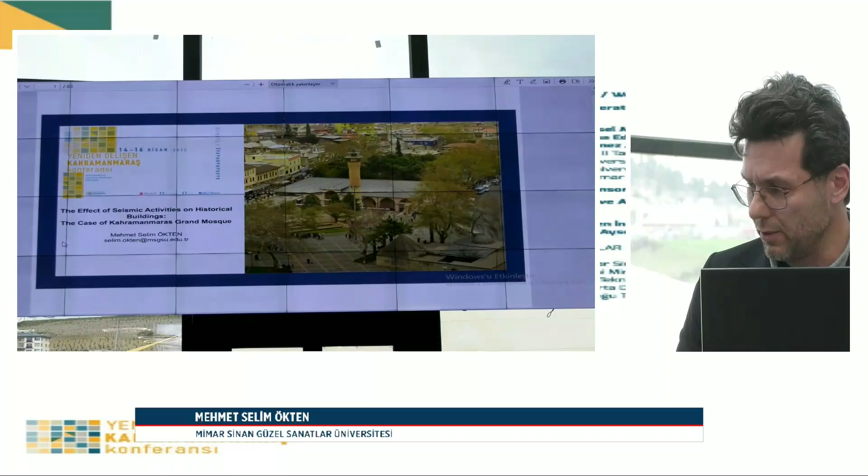After the February 6 earthquake, the Directorate General of Foundations, Vakıflar Genel Müdürlüğü, invited me to participate in scientific committees for historical structures in the earthquake region. So I am responsible for many historic mosques in the area, and I came here several times a year, to Maraş, Kilis, Elbistan and Antep.

So this is my content, as I mentioned before. Structural engineers love to show this map in their presentations, because these red and orange colors show the danger of the seismicity of Turkey.

85% of Turkey is located in a very severe, dangerous seismic zone. But unfortunately, after the earthquake, we immediately forgot where we live.

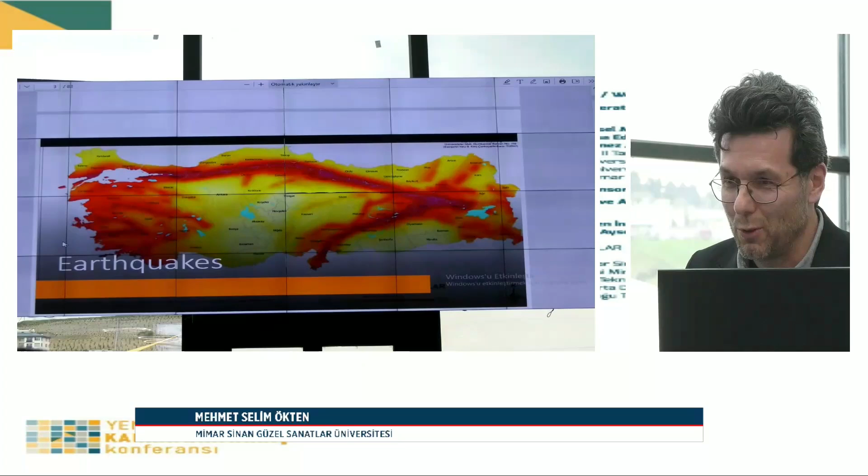The February 6 earthquake is a very unique earthquake. In structural calculations, we use this spectrum graphic, and this red line shows the limit we use for accelerations in our calculations. But you see these gray lines show that they exceed the limit, they exceed the code limit. So this shows the magnitude of this earthquake.

On the right side of the map, we show a rupture on the fault line, and also it affects a very huge area.

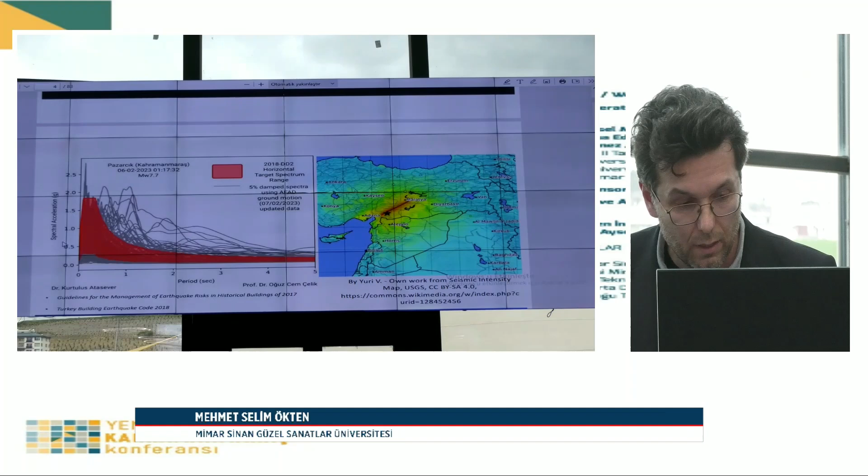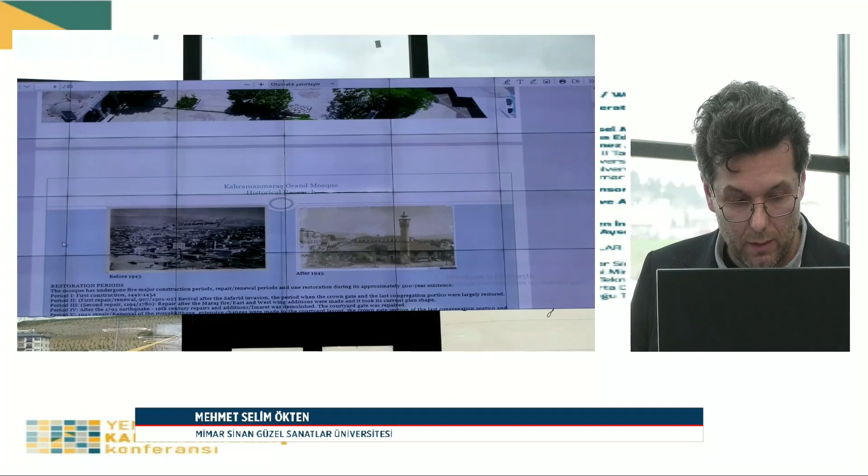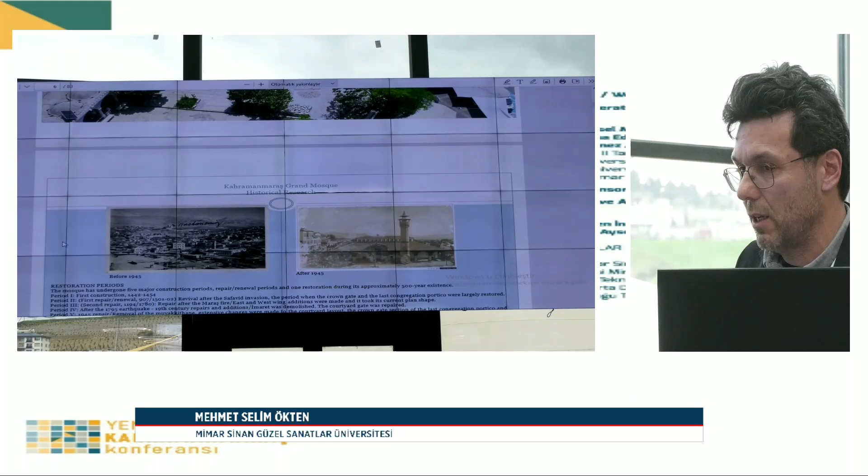Unfortunately, this picture shows that the minaret collapsed on top of the roof of the mosque. Historically, this mosque was built in the 15th century, and in five periods faced several renovations and restoration projects because of earthquakes and fires and things like that. But the important thing is between 2006 and 2007 the last renovation project was held, just nearly 15 or 16 years ago from this time.

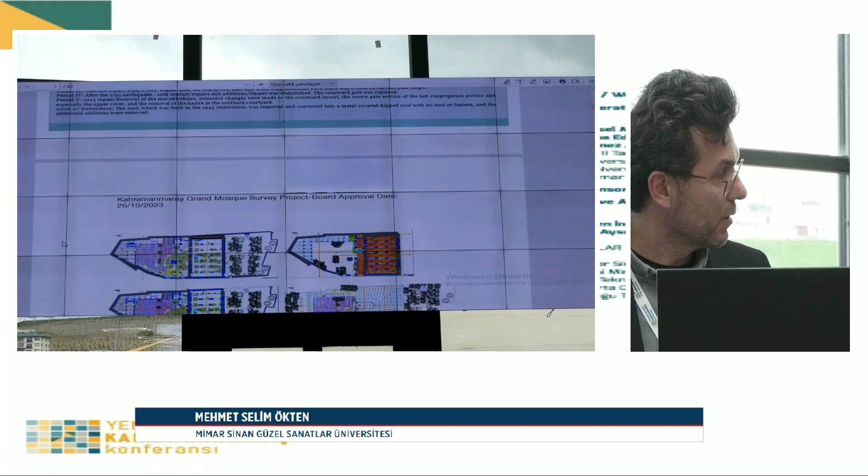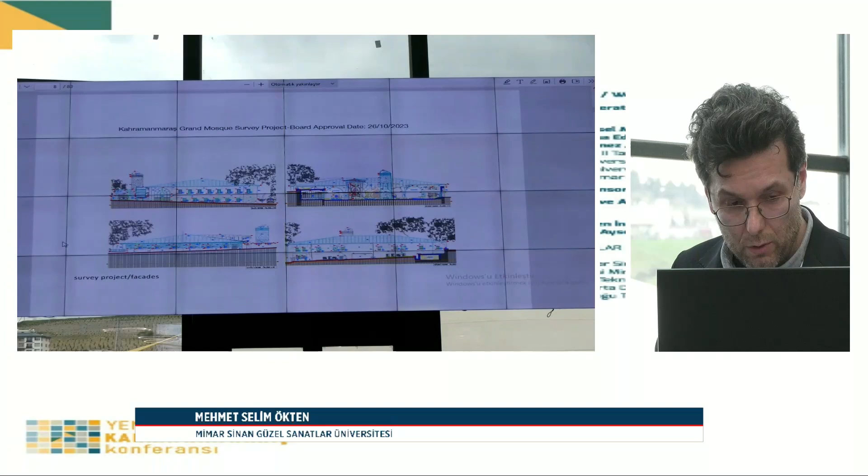After the earthquake, a comprehensive study started immediately. These are the drawings with board approval dates. The survey project started immediately to get information from the mosque, from the archives, from the thesis, from the photographs, because it's very important to document this mosque in archives. So the survey project started. You see also damages on facades of the walls, and all the cracks on the walls of the mosque.

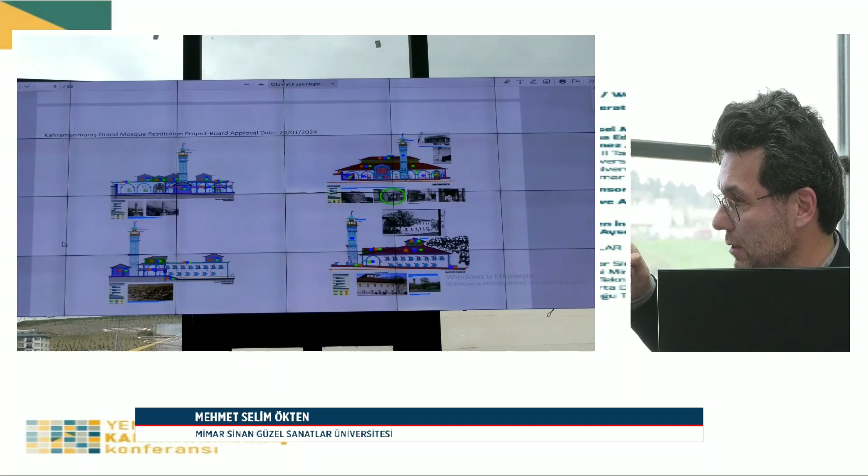In 2024 the restitution project was approved. Before 1945, in the time period of the history, we saw that the roof type was slightly different. The mosque had a different roof type, but the restoration project approved the current version of the roof.

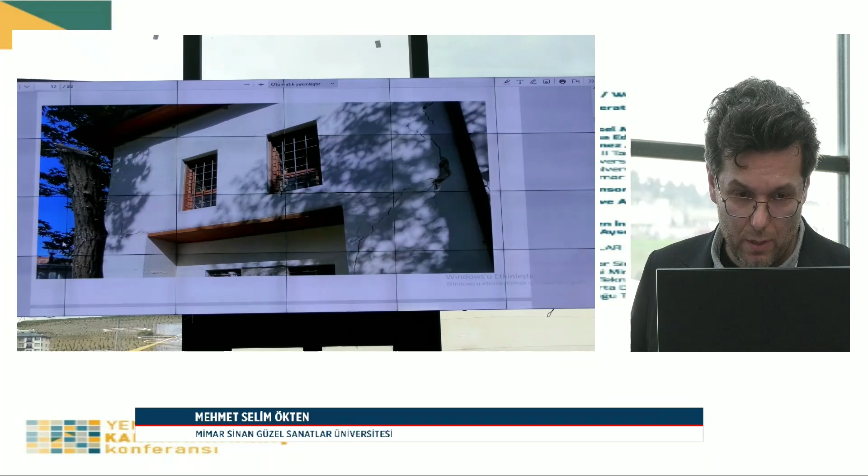As I mentioned before, the minaret collapsed on the entrance portal of the mosque, so it gave severe damage to the mosque. Also, all of the facades got cracks and damages. These are the photographs inside the mosque. Also you see how the plasters fall from the surface of the walls because of the magnitude.

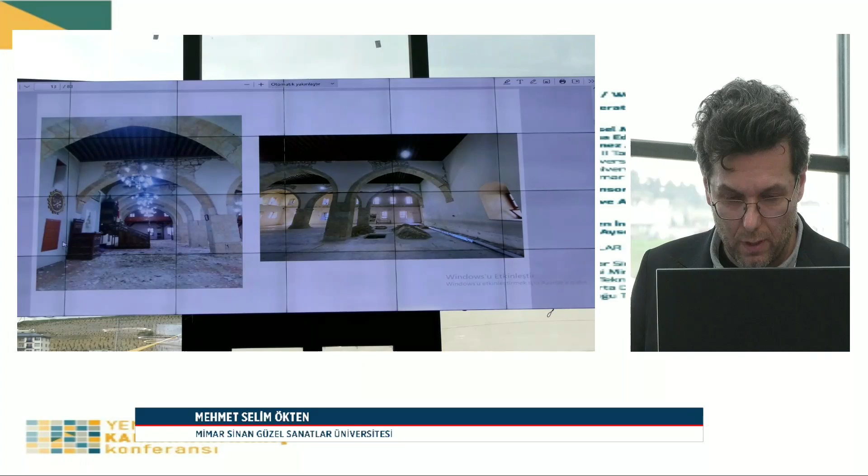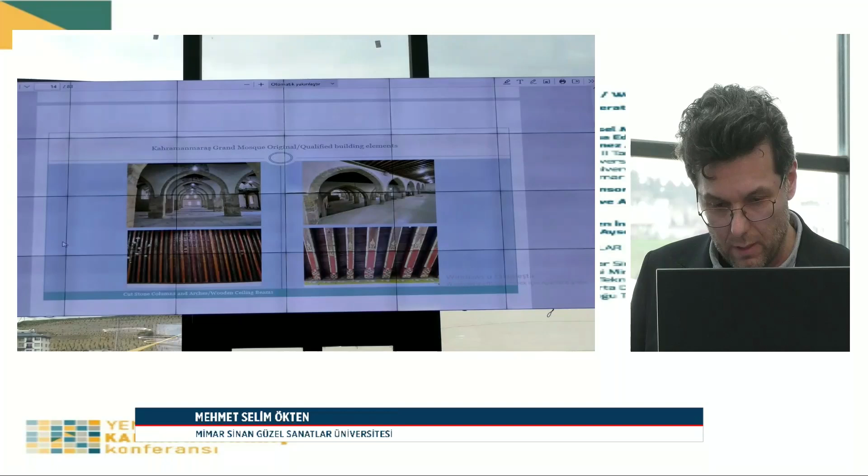This mosque is very unique for its stone columns, stone pillars, and also these magnificent timber beams with ornaments and drawings. It's very unique for this mosque. Also the kürsü, mihrab, and minber are very unique identities.

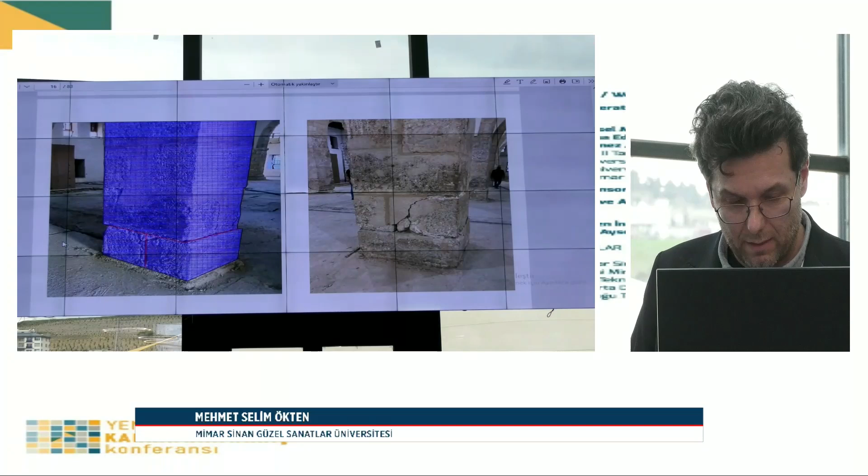Another damage is the displacement and movement of the columns at the base line of the pillars. You see the damages and the movement because of the earthquake effect.

After the earthquake, we tried to get observation and diagnose the mosque very well. So we did some openings to see the composition of the wall and also to discover the timber lintels in the wall. These pictures were taken from the west side, the west facade of the wall.

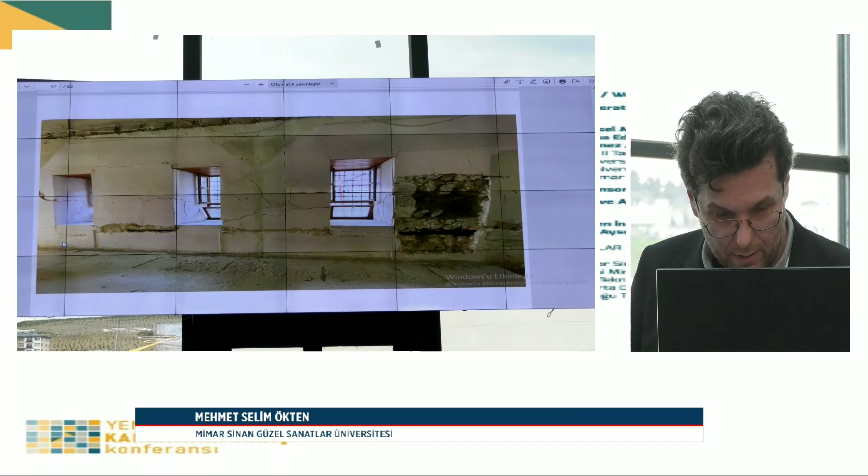At the left, you see white mortar injection in the left picture. This injection belongs to the 2006 restoration. It's a kind of hydraulic lime injection.

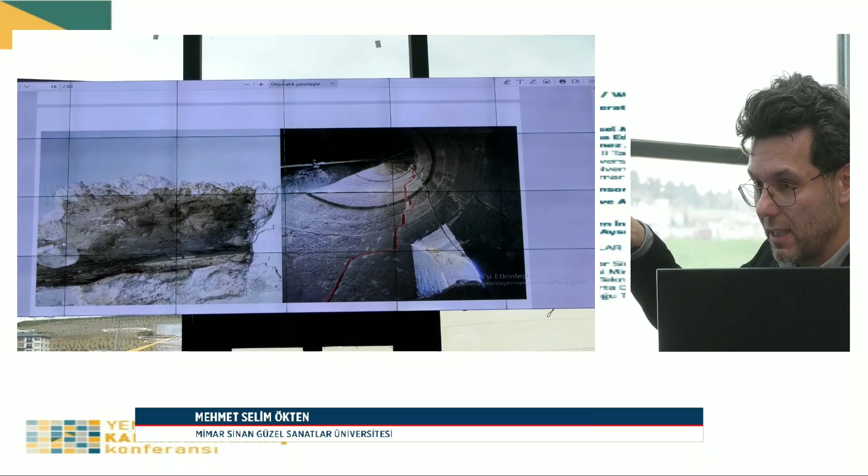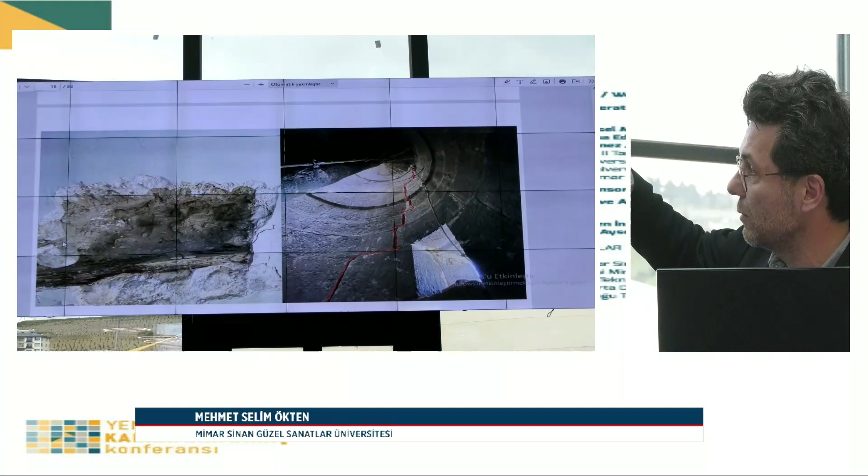Also, another point, you see the rotted timber beam in the picture. This picture told us a lot of information about the mosque, because this lime injection didn't work properly. It filled the gap, it filled the voids, but there was no bonding between the earth structure and the mortar structure. Yes, it filled properly, but it didn't bond the mixture very well.

Another picture belongs to the inside of the minaret, and also you see the cracks and deformation.

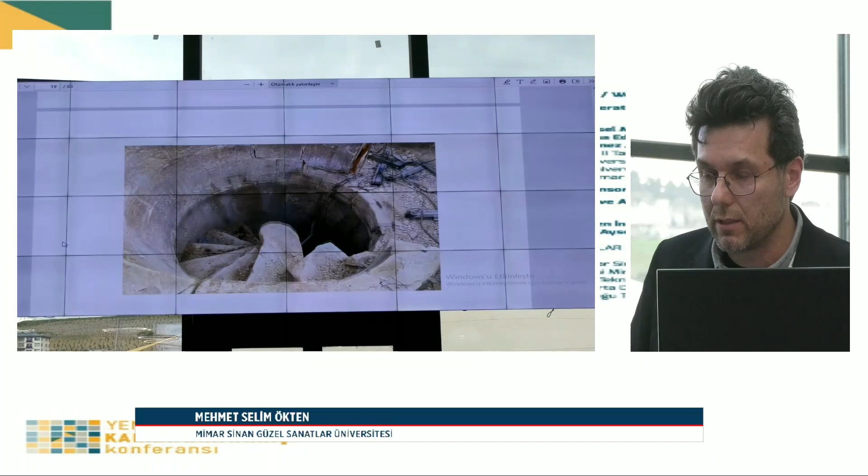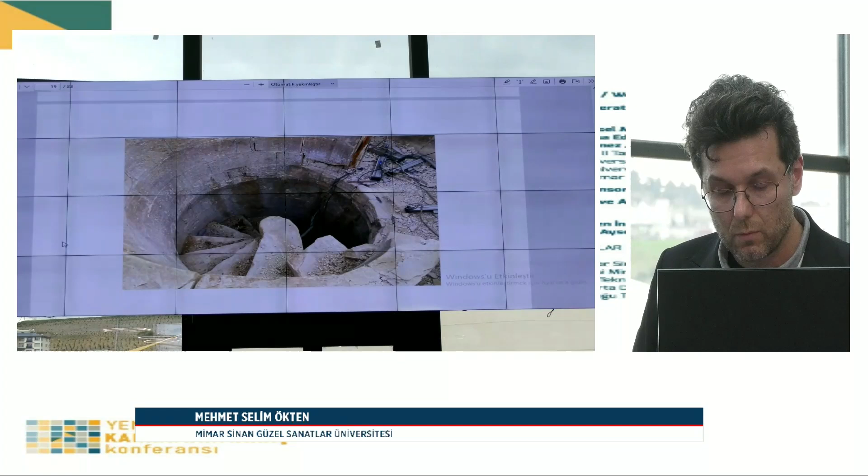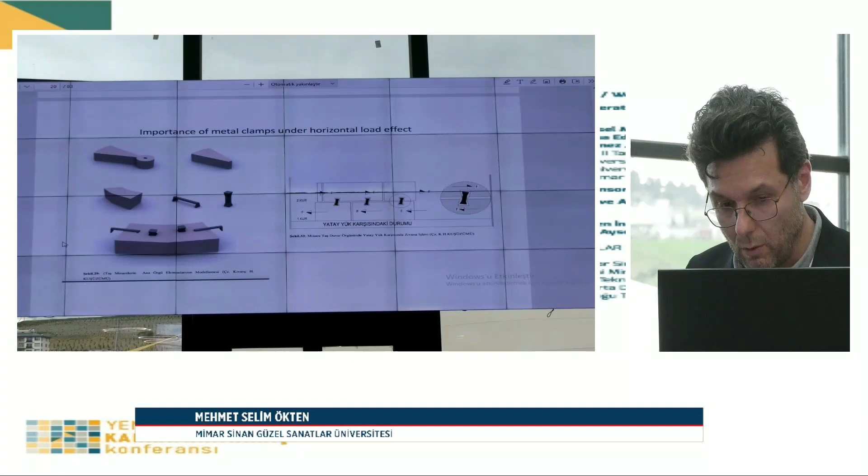Another observation from the minaret: generally in earthquake zones, we use vertical and horizontal metal clamps to connect stone together. It worked very well in earthquake zones, but in this minaret, we only discovered insufficient, corroded horizontal metal clamps. We didn't find any vertical metal clamps. Especially vertical metal clamps work efficiently in earthquake zones, taking the horizontal forces, as I've seen in the picture.

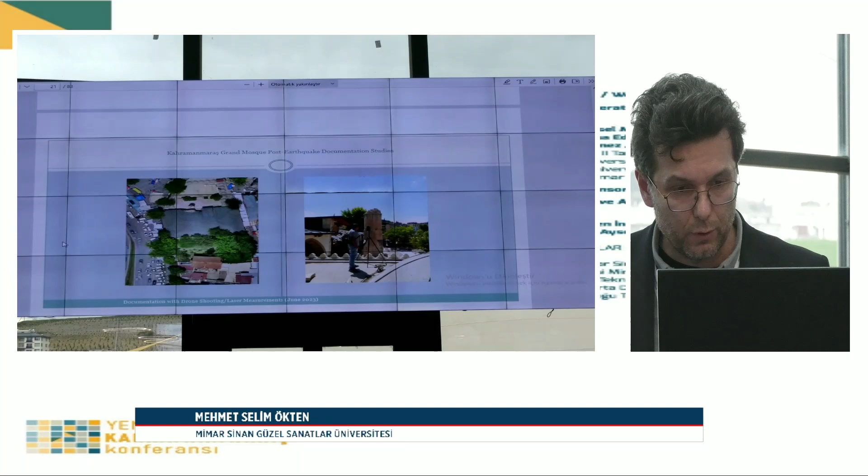So after the earthquake, documentation studies started immediately. These are the pictures from the scanning.

Because of the heavy damage of the minaret, the board decided to remove it, and these are the rubble cleaning and classification of original stones. When we remove the stone parts from the minaret, we classify them because if they have sufficient compression capacity, we will use these stones again in the reconstruction project.

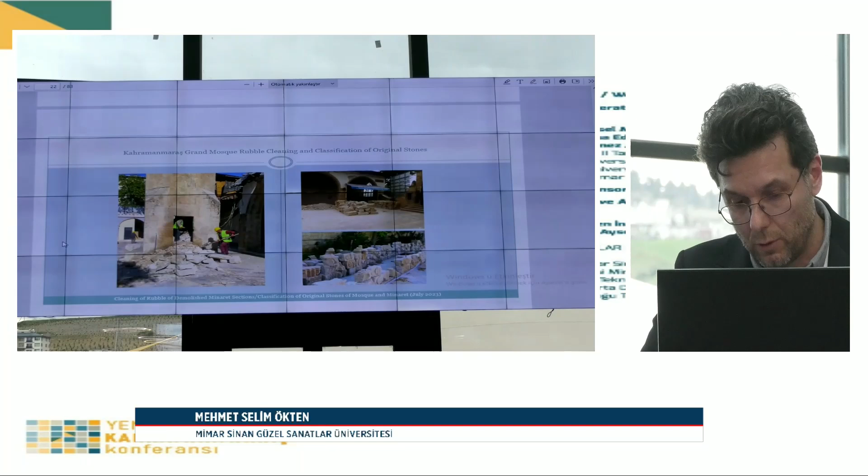At the same time, ground survey studies started because as a structural engineer, it's very important how you settle your foundations, as they directly affect earthquake capacity.

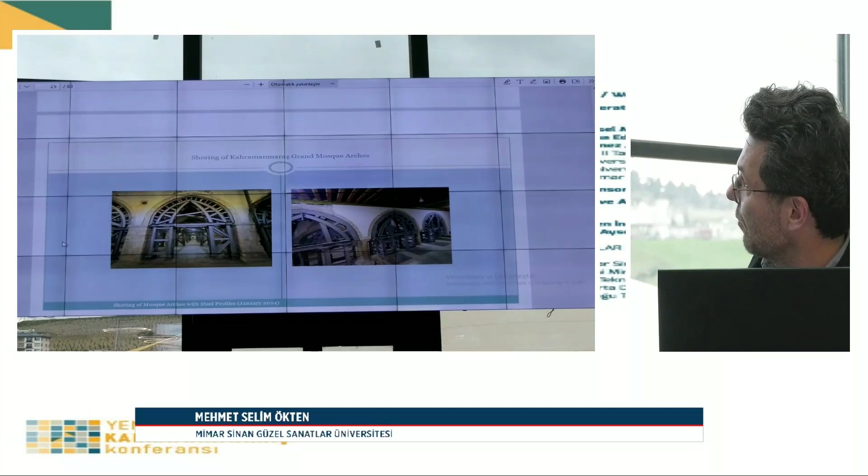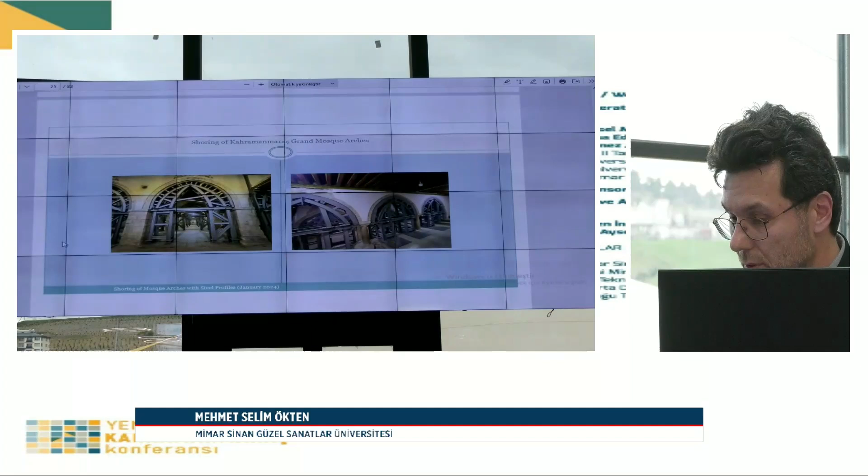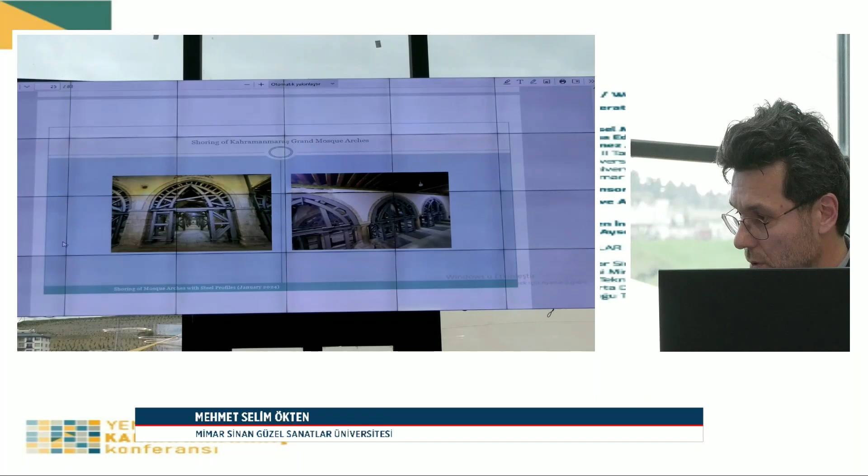We know that after the major earthquake, we face other small earthquakes, so we have to provide a safe environment for researchers and workers. This is the metal shoring to keep the structure safe. Workers work in it, and also researchers do their studies. These are the shoring projects.

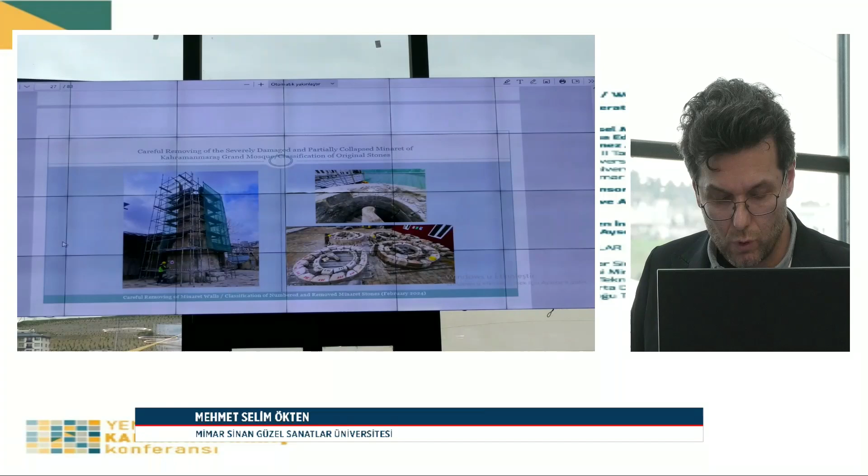Again, classification of original stones of minarets. We use these stones again. Restoration projects take too long; it takes time to make this project.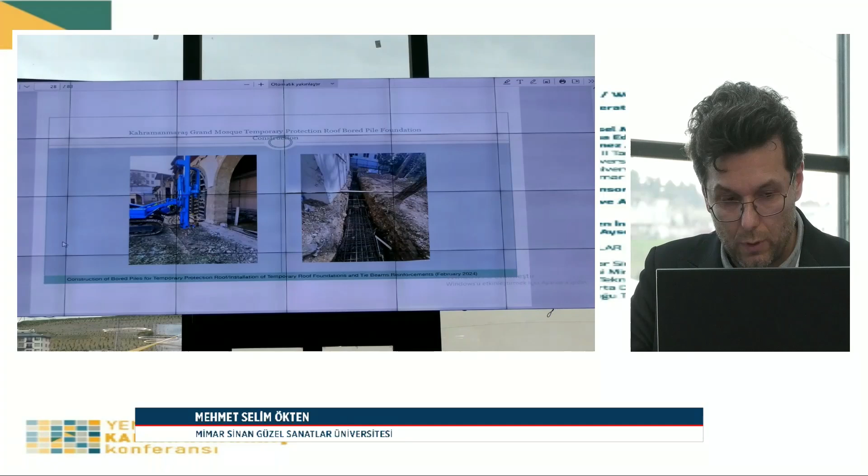So to study continuously for 1 year, we have to build a protection roof. These are the foundations of the protection roof project, and in May 2024, we started to erect the structural system of the protection roof.

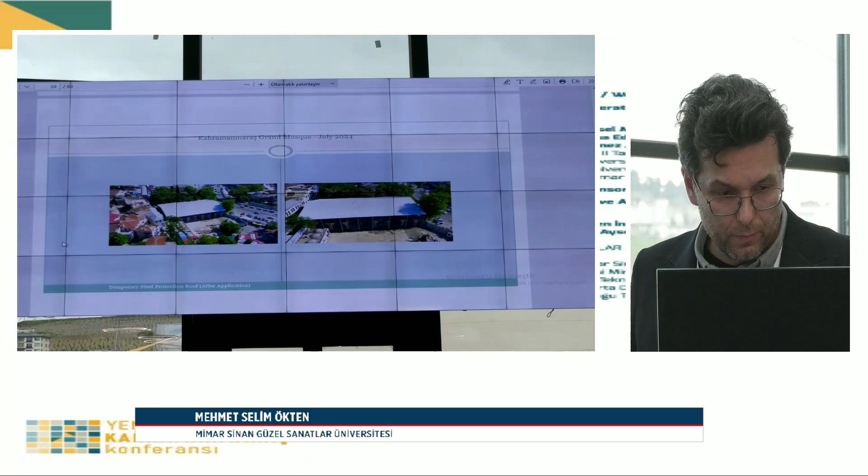After the erection of our protection roof, we made some observations on top of the walls, and these are the structural ingredients of the masonry walls. This is double leaf masonry wall construction: inner and outer sides consist of more decorative and more compressive resistant stone material, and inside we put some rubble masonry, earth and lime inside the wall to provide the bonding effect.

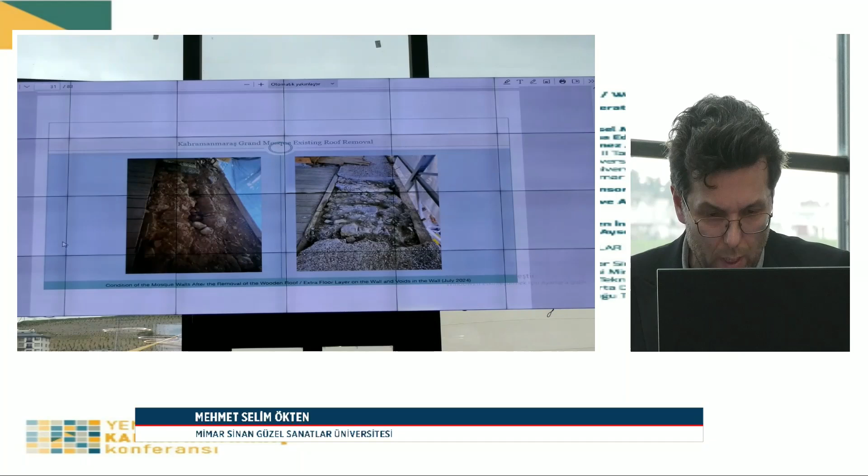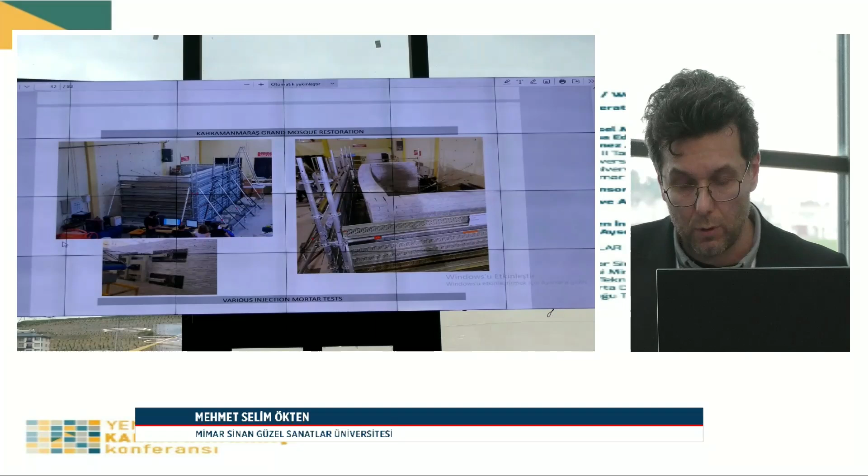So by this time, we realized that there are some gaps and voids inside the wall, and the previous injection didn't work. So we decided to make some experiments at 2 universities to get the proper injection, the proper ingredients, and the effective injection project to protect the structure.

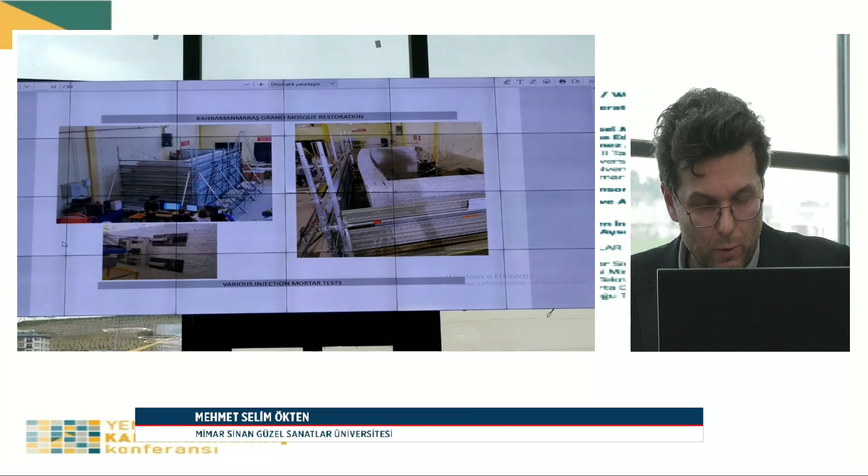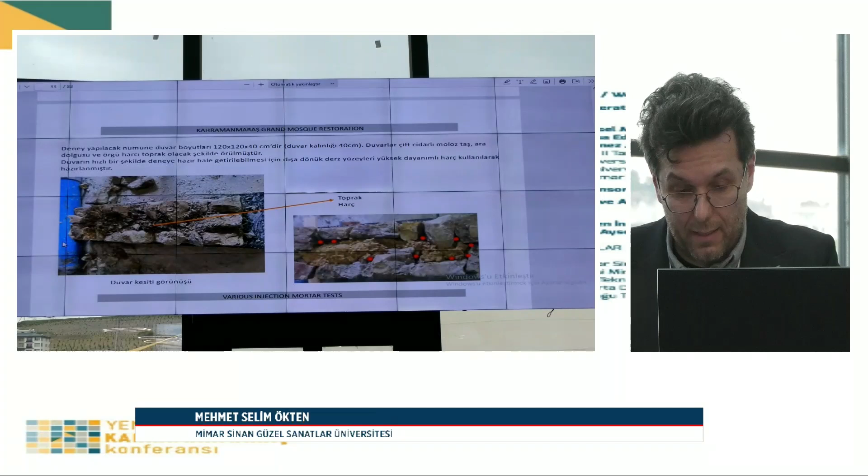These laboratory tests were conducted at İzmir Institute of Technology and Mimar Sinan Fine Arts University, my university. In the site, in Maraş, the responsible company prepared wall sets on site. These wall sets are identical to the walls in Kahramanmaraş Grand Mosque, the same type of walls.

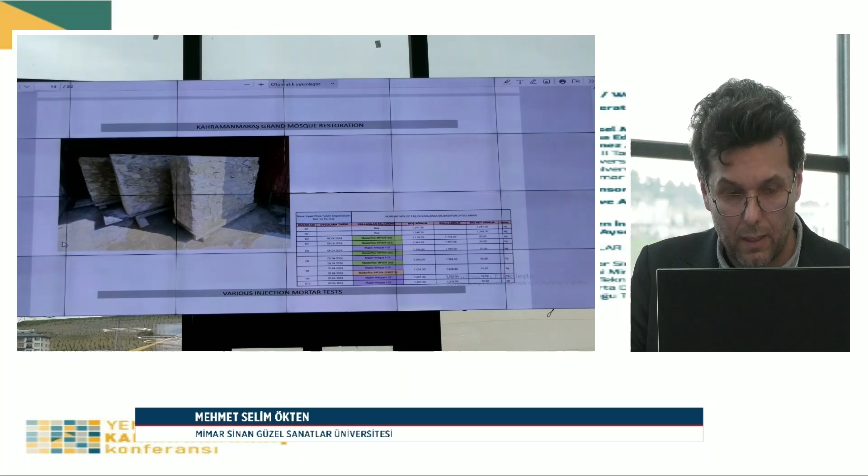When we cast these walls, when we built them, we transported them to İzmir Institute of Technology for structural tests. We injected different mixtures and different compounds to find the proper injection ratio and the proper injection ingredient.

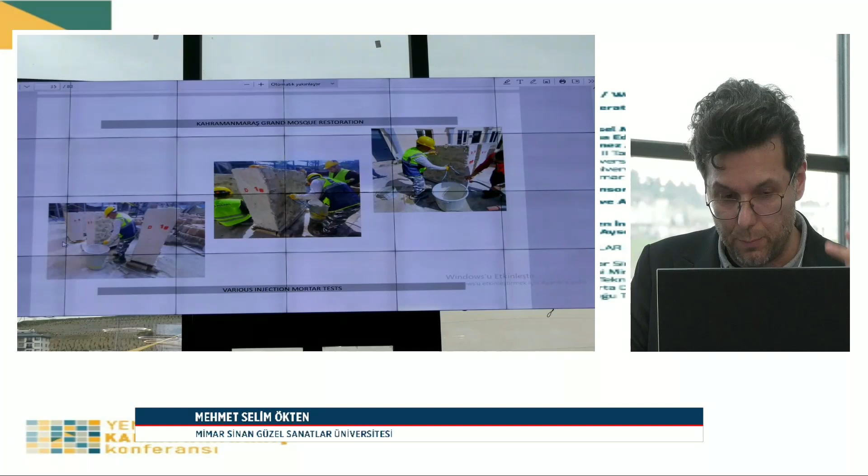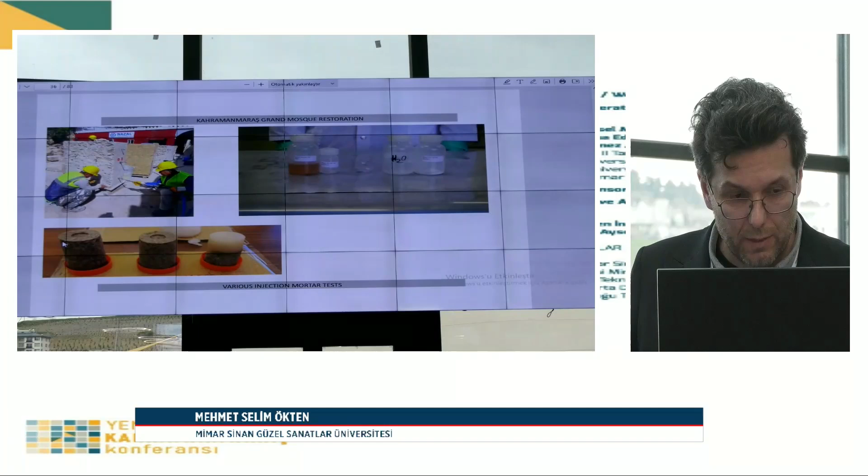These are the pictures from the site. Also, we tried chemicals, acrylic, to get better bond between the materials, and we conducted electron microscope tests to see how the material penetrates and how the material bonds together.

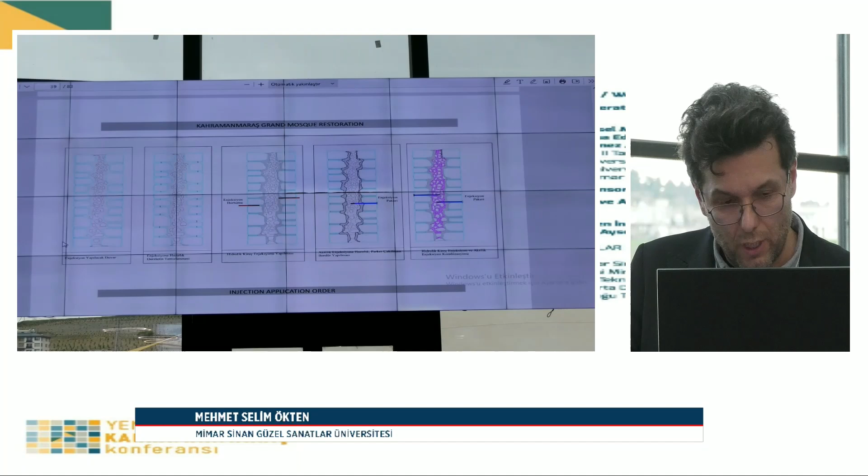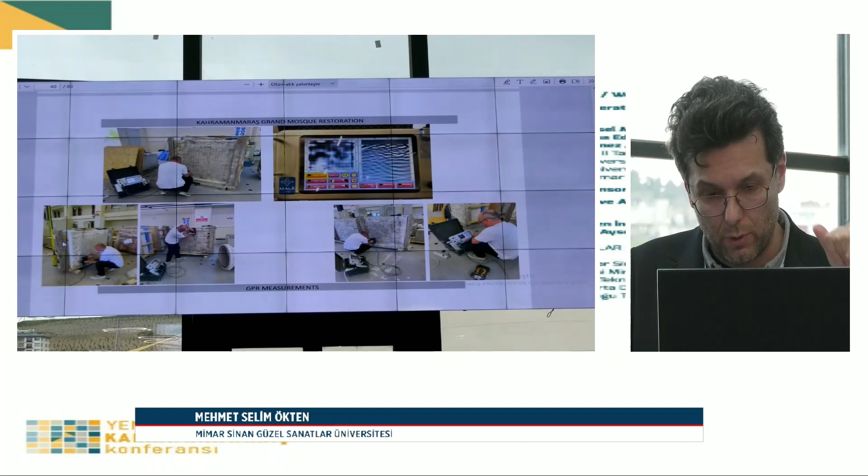These are the stages of how we apply the injection project to our wall sets. These are another round of GPR scanning. When we apply the injection, we then control the sets to check if it fills the gaps or not. So we will be assured of the methodology with these laboratory tests.

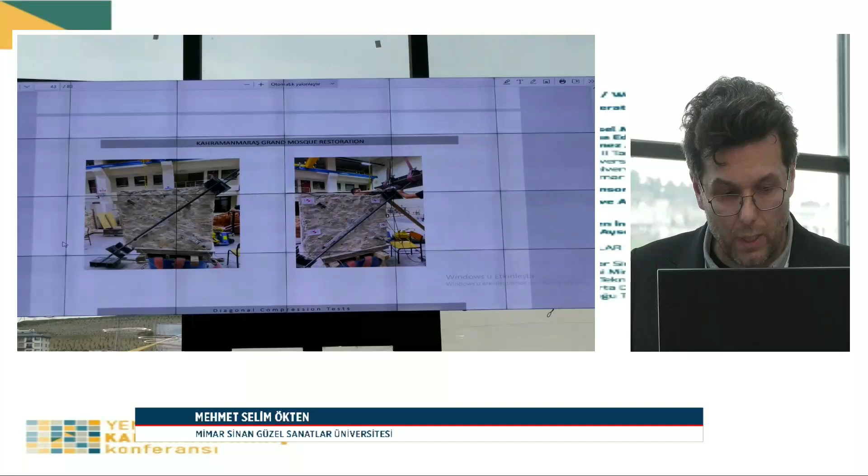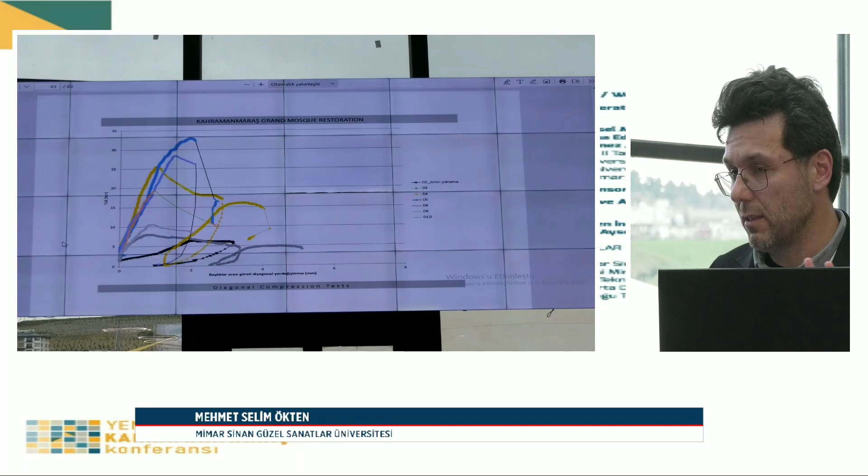Finally, diagonal compression tests were conducted at İzmir Institute of Technology, and we got the force and deformation results. All these experiments resulted over 5 months, and from these results, we chose the proper injection ingredient and method.

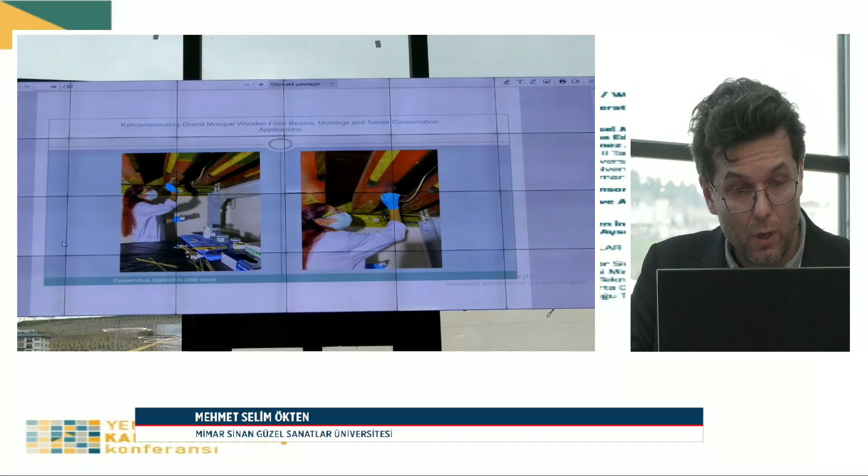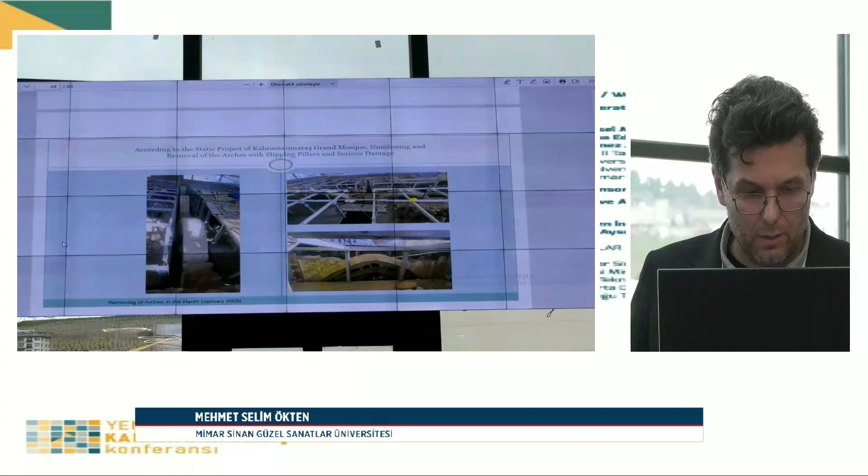Now the company applied the injection to the walls of Kahramanmaraş Mosque. These are other photographs from conservation applications to the floor beams, also the moldings and other applications. In very severe damage zones, we have to remove these parts to reconstruct. These are the pictures, also showing the injection.

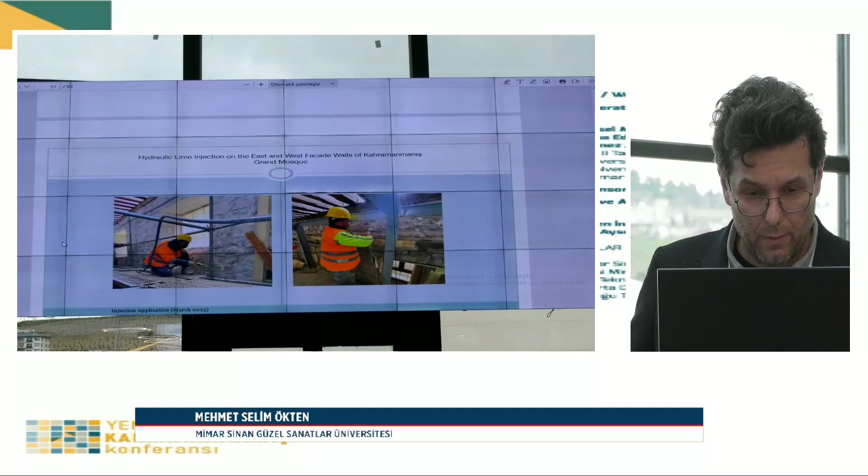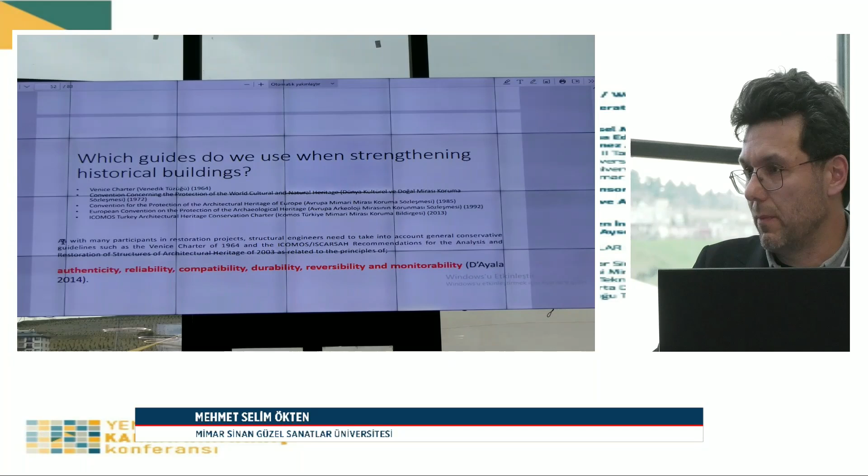So I finished the first part. These are not all the repair and strengthening projects, but from the earthquake to this time, we started injection, we started timber conservation, and in future applications we will apply some structural elements to the structure, beams, lintels. So it takes time. We are asking your patience for this duration. So the second part is starting right now. Okay, running out of time.

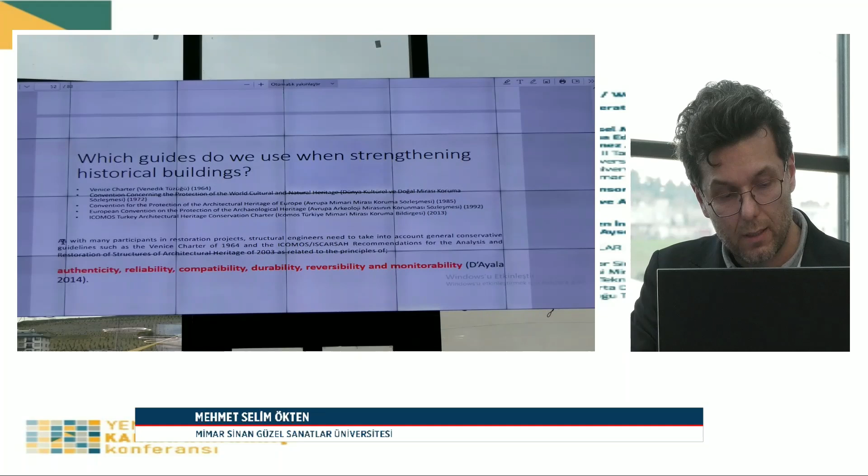So we use some guidelines when we approach these historical structures, and we follow these parameters: authenticity, reliability, compatibility, durability, reversibility, and monitorability. But in restorations carried out in Turkey up to this time, the focus has especially been on the principles of aesthetics and form, and unfortunately the structural intervention was neglected.

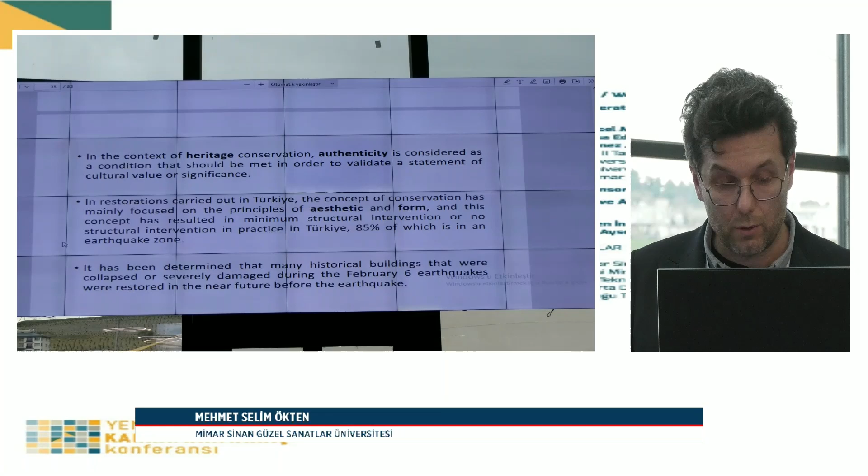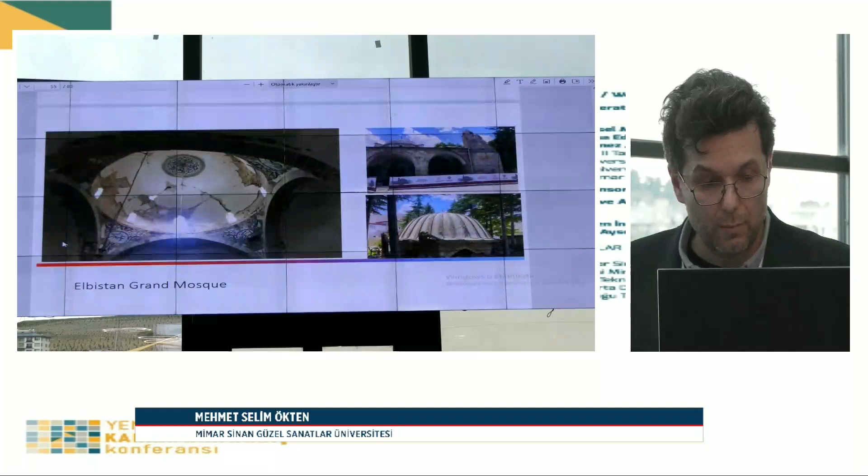Unfortunately, it has been determined that many historical buildings that collapsed or were severely damaged during the February 6 earthquakes were restored recently, before the earthquake. So these are all pictures of buildings renovated just a few years ago: a mosque from Antep, Elbistan Grand Mosque, Habibi Neccar Mosque.

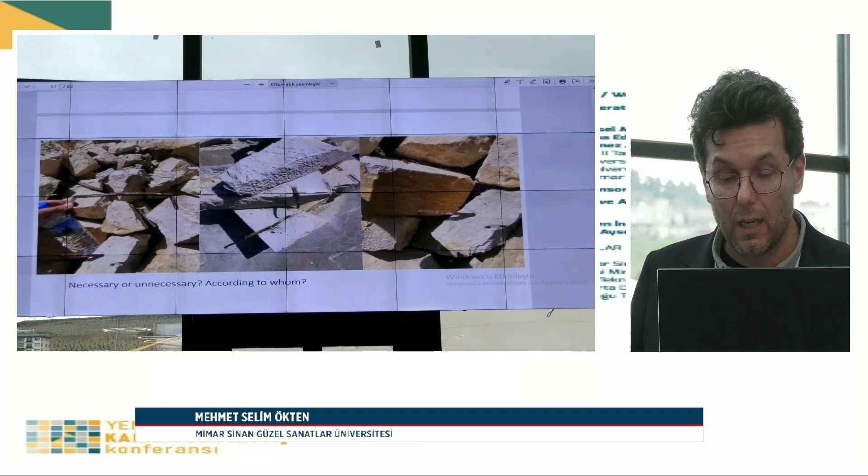What I mean is, most of the time, structural engineers face the question: is this application necessary or is this application unnecessary? So we have to follow the guidelines and codes in our country.

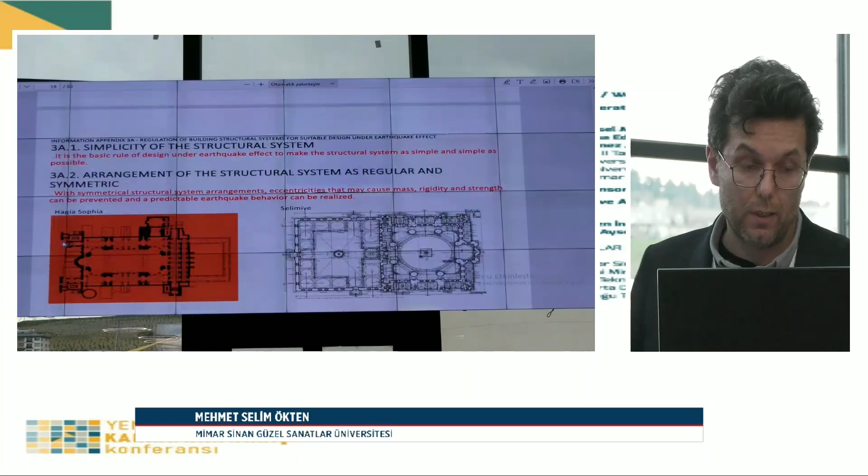We already have these guides and codes. The principle is the same for all structures: if you make a homogeneous, symmetric, rigid, simple structure, it works well in earthquakes. We saw this from Hagia Sophia.

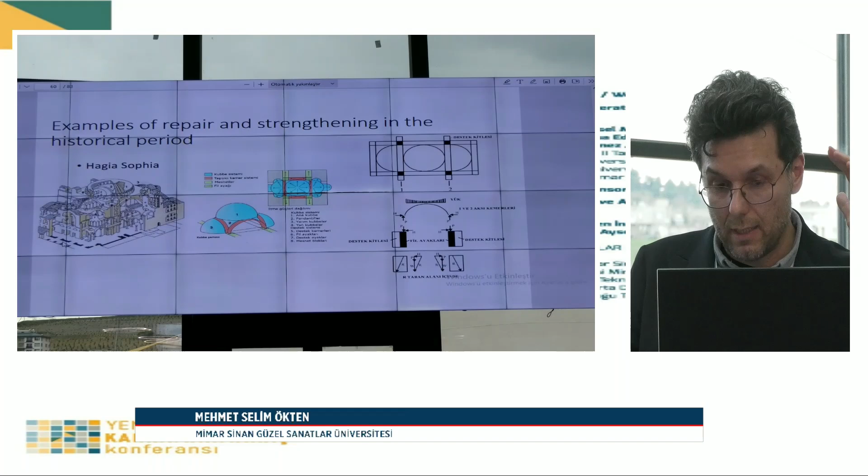We know that historically the Hagia Sophia dome collapsed several times, and the great architect Sinan added additional buttresses. So it solved the problem until this day. Yes, it has affected the view of the structure, but it works well.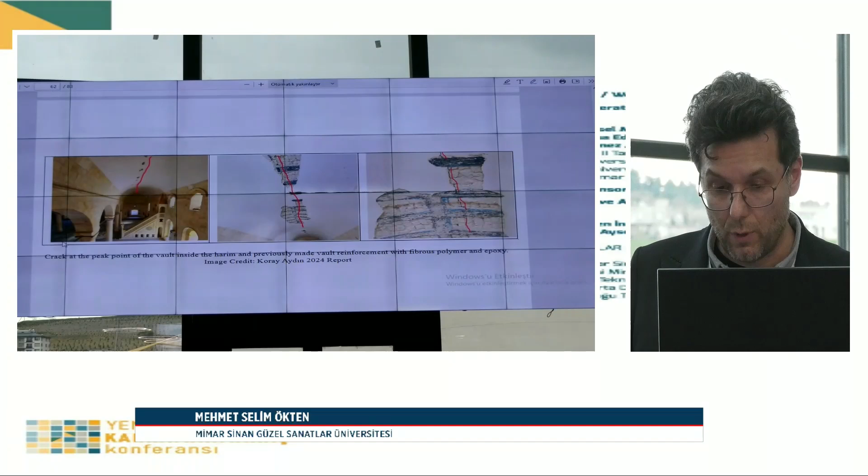So we have a few samples from before the February 6 earthquakes. This is from Şanlıurfa, where the walls were strengthened with FRP. This is from Kilis Tekke Mosque, where the dome was strengthened with FRP. These applications were also applied with epoxy.

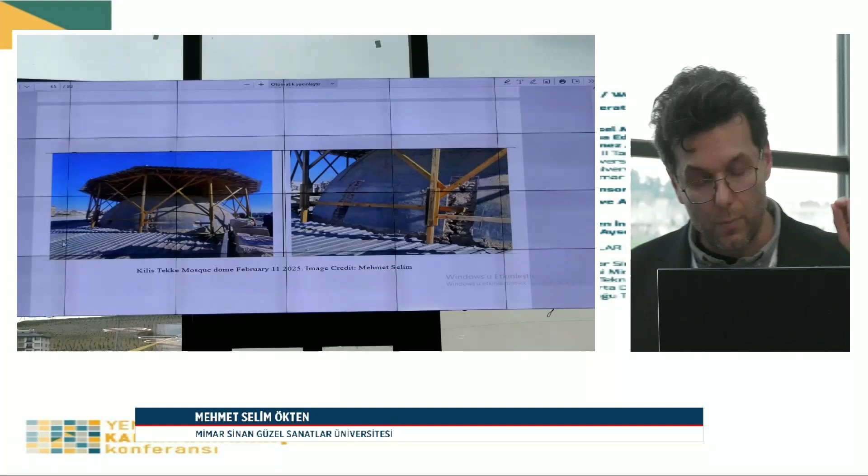Nowadays we don't use epoxy, but what I mean is these structural applications work well.

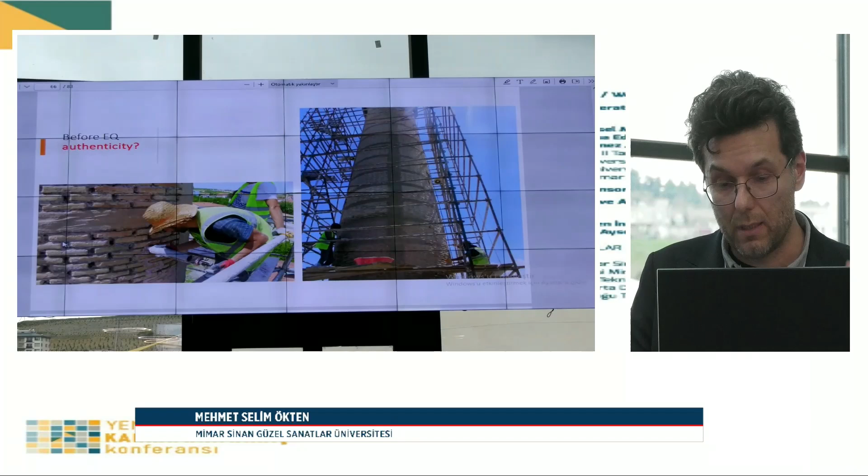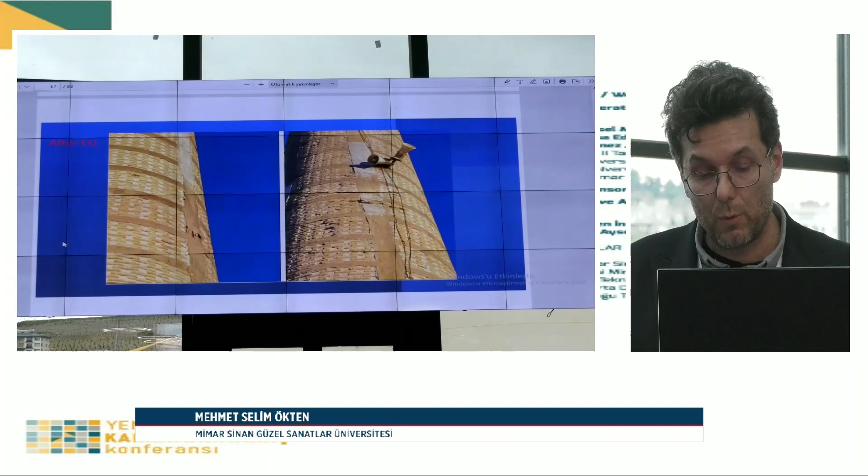Also this Battal Gazi minaret - I know we can say a lot of things about the view of this minaret, but it faced two major earthquakes: in the beginning of the 2020s, the Sivrice earthquake, and it worked, it didn't collapse. And also in the February 6th earthquake, it didn't collapse.

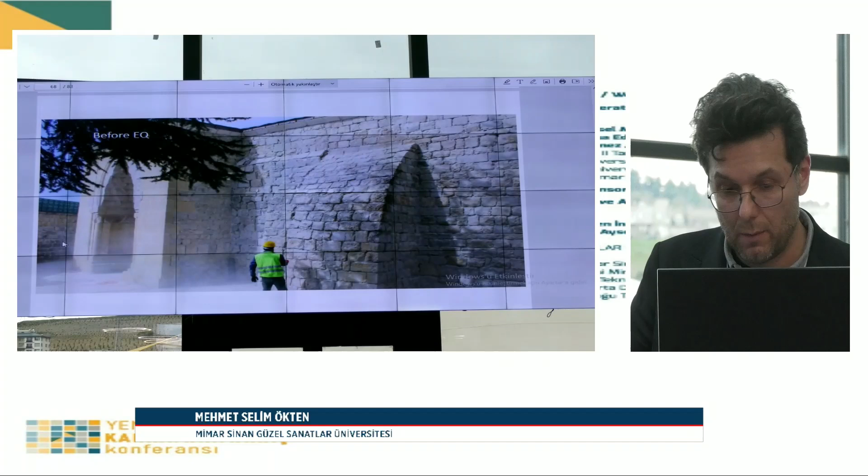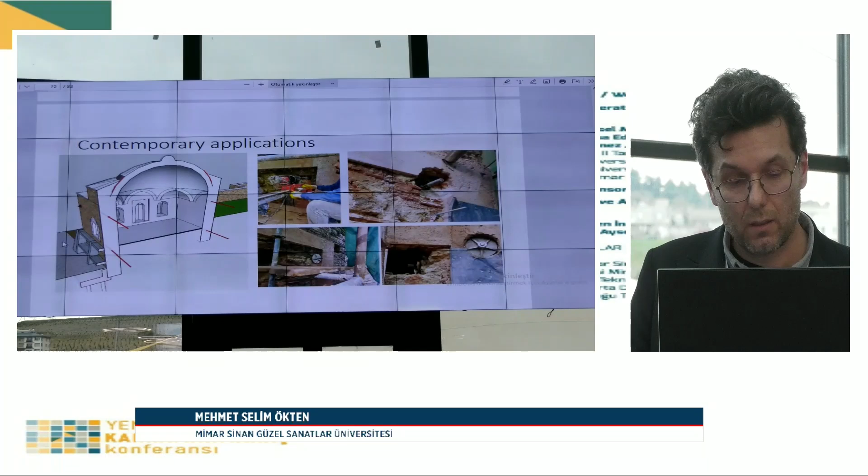But if we use improper application with poor workmanship - this is also the same mosque, Battal Gazi Mosque in Malatya - just before the earthquake these buttresses were built, but you see improper anchorage and corrosive anchorage, and just the renovated part collapsed. So nowadays, thanks to drilling technology, we use stainless steel bars to attach all the walls together.

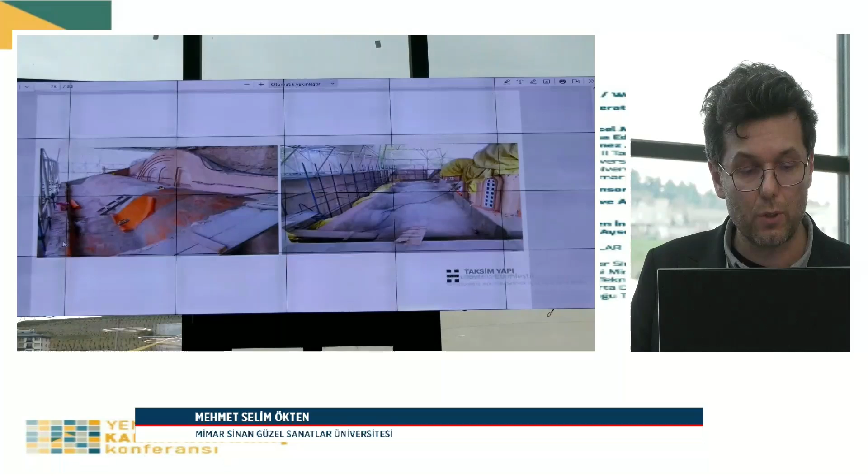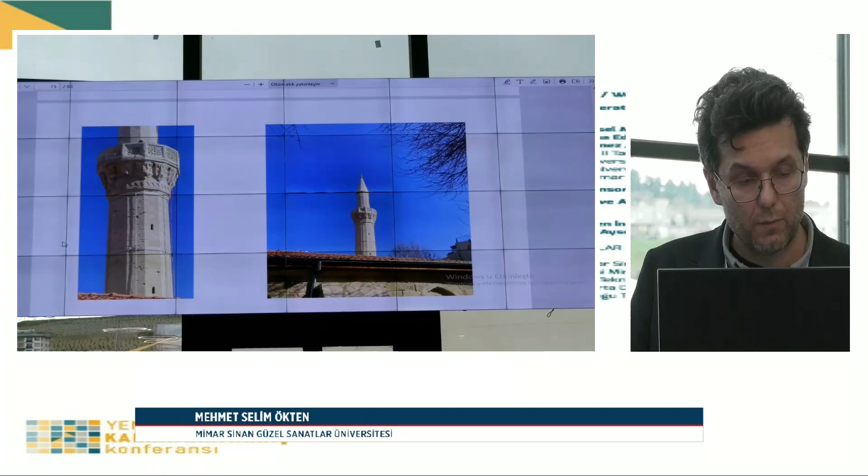TRM, textile reinforced mortar technology, we can use - this is the roof of Kariye. And also for reinforced minarets, nowadays we use continuous reinforced bars to improve the strength of minarets. We can apply it externally or inside the minarets.

This is the approved project of Hagia Sophia Fatih minarets. In a few years, you'll see this reinforcement on top of the surface.

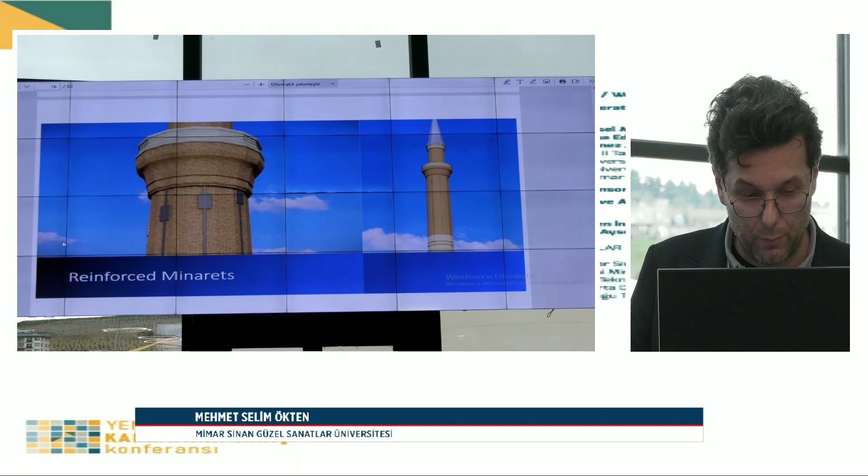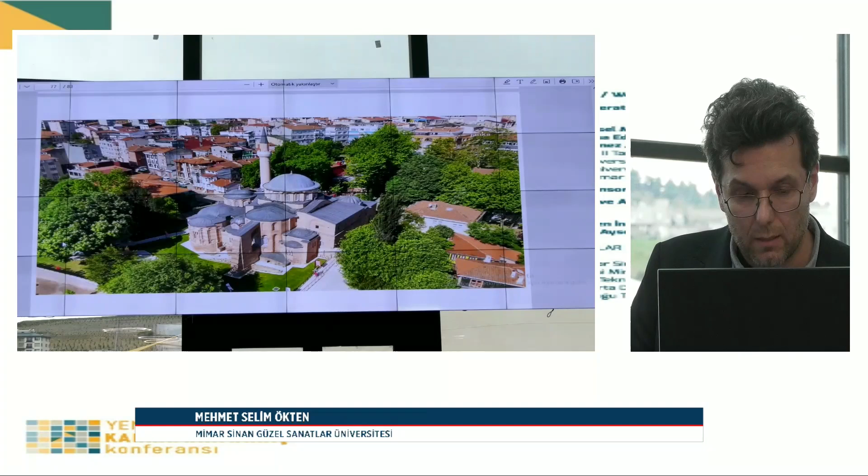Also, I'll finish in a minute. We know the renovation of Kariye was completed last year. In the renovation process, we discovered that this dome had collapsed in the 18th century, and they replaced it with a timber dome, and it worked well again.

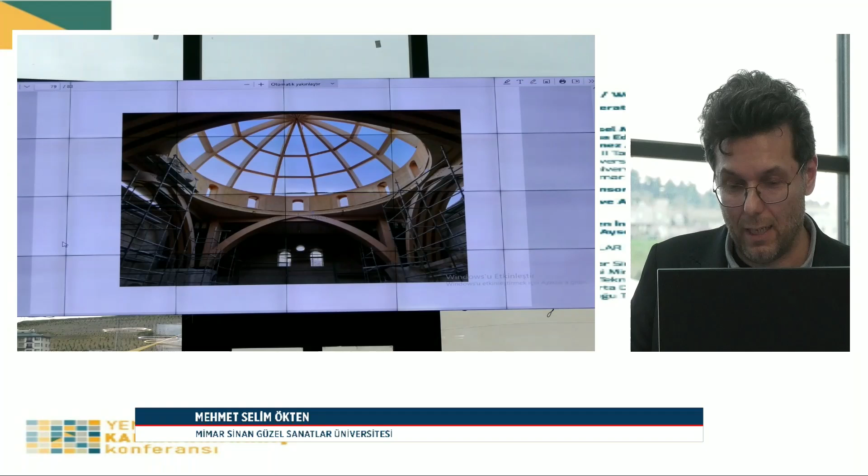So we used this technique in Habibi Neccar Mosque again. We have to open up to new ideas and technological improvements in our work. Also, we can follow health monitoring - it works very well, it works very well.

So the restoration of historic buildings requires a comprehensive approach, we know. Unfortunately, before the February 6th earthquake, we did very little structural intervention to our historic structures, but this idea changed. February 6th earthquakes were a milestone for these things.

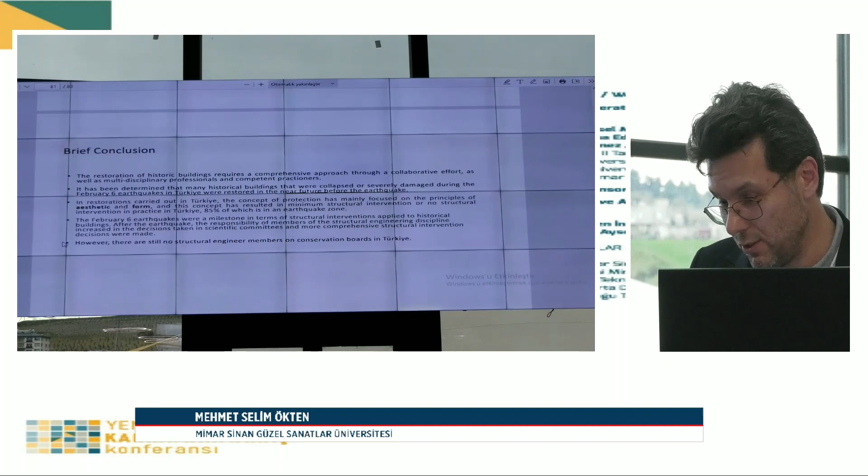However, there are still no structural engineering members on conservation boards in Turkey. We have the professionals, we have the knowledge, we have the laboratories. I think all the disciplines should come together and find a method to follow the codes. Otherwise, decisions change from scientific board to scientific board, and very different decisions are made.